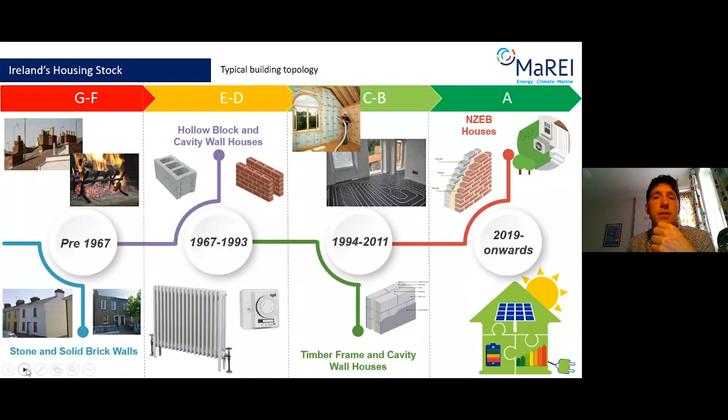So what's the quality of that building stock like? So we'll just move on to the next slide. The quality in terms of its energy performance is determined by the energy performance certificate. This is a requirement from the EU that all buildings have an energy performance certificate. That energy performance certificate in Ireland is called the Building Energy Rating.

So all new homes that are built since November 2019, and all those that get significant retrofit, have to be an A2 building energy rating or better. To put that in context, if you build a house to the building regulations 2005, the new regulations have a requirement to have an energy performance that is, in primary energy consumption, about 30% of that of the reference building in the 2005 regulations, and the emissions associated with the house about 35% of that of the reference building of the 2005 regulations.

On the right hand side, each of these building energy ratings, or BERs, have to go into the national database. It's hosted by SEAI, so there's over 900,000 entries to date, and you can see the different quality of buildings in terms of the building energy rating that we have, with the average BER being a D1. So Ciara in her first presentation is going to delve into that database in a bit more detail.

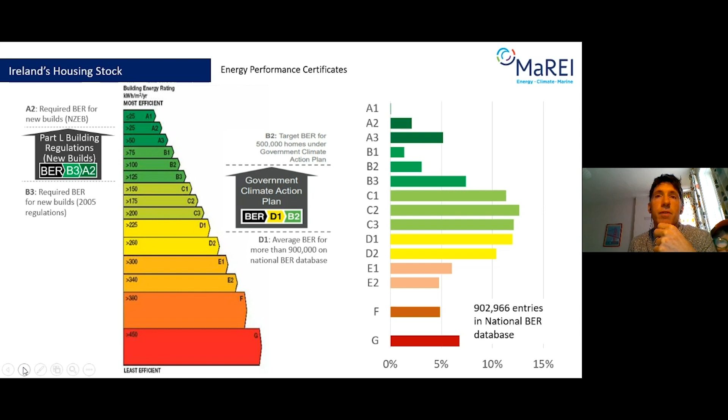So next question: the Irish government's Climate Action Plan 2019 set a target for 500,000 homes. That's 50,000 homes per annum on average, receiving a retrofit to B2 or better. So what I want to know is, that number, 50,000 homes per annum, is that equivalent to all the occupied homes in Cork, in Galway, in Castlebar, or in Dublin?

That's great. So we can see people voting away there, and that's great. So just as we're a little bit tight on time, I'll talk through the different ones.

So the top vote there is Cork at the moment. Cork City is about 50,000 occupied homes, so that's the answer to that one. So effectively, the ambition from the Irish government is to retrofit all of the homes that are occupied in Cork City in a given year, say this year or next year.

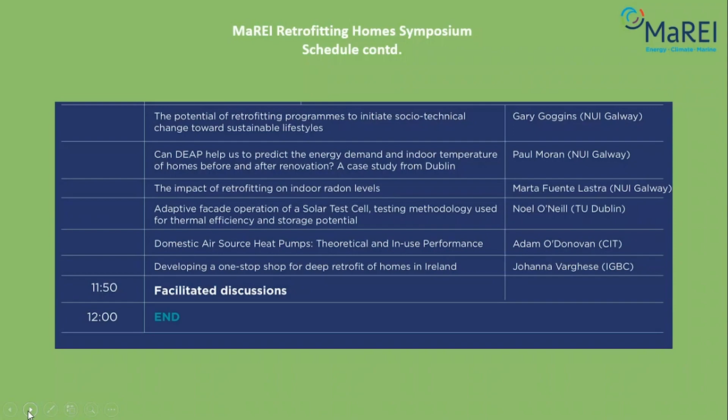Okay, so this morning we've 12 speakers coming up. So we have 2 sessions in there. So there's 6 speakers first, and that's going to be moderated by Josephine Maguire, who's the National Coordinator for Sustainable Energy Authority of Ireland. So Josephine has been more than 10 years leading strategy and programs related to retrofitting homes in SEAI. And then after that session, we'll have an afternoon session with another 6 speakers and facilitated discussions. Unfortunately, Brian Norton from TU Dublin wasn't able to join as a facilitator this morning, so I will do that. So I'm going to hand over to Josephine for the first session.

Great, thanks very much, Jamie. You're having fun there. So great to be here, everybody.

We have a great lineup for you this morning. Lots of interesting speakers talking about very interesting things that we all need to do over the next 2 years. We're tight enough on time, so I'm going to move quickly and just introduce our first speaker. It's Dr. Ciara Ahern. She's Head of Building Engineering in TU Dublin. She's been studying and analysing the Irish housing stock for more than 10 years, and particularly is interested in looking at how we integrate heat pumps into thermally refurbished stock. So Ciara, over to you.

Thanks, Josephine. And thanks, Jamie. Good morning, all. I'm here this morning to present research that was published in an Energy and Buildings paper in 2019. And the data source for the research is the EPC, the Irish EPC or BER database, which was downloaded in July 2014. And the analysis is on pre-2006 dwellings. On the next slide, you will see the number of state refurbishment grants paid in Ireland by 2015. And you'll see the lion's share of grants being paid to what are perhaps the less disruptive measures such as roof and cavity

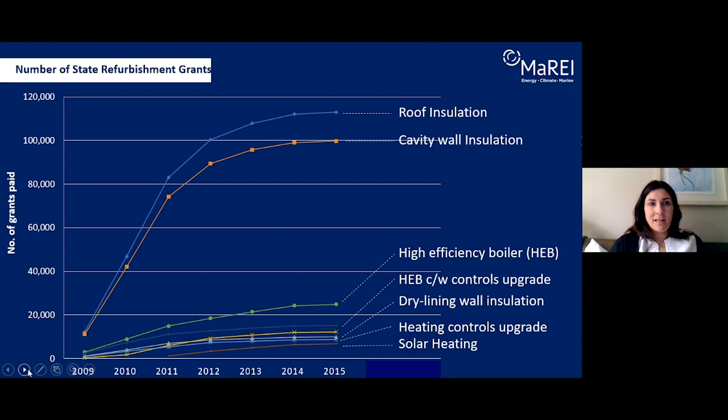wall insulation. And on the next slide, you'll see that the level of thermal refurbishments are leading to a bimodal distribution of the housing stock. On the left-hand side of the graph there, you see Mode 1 dwellings. Mode 1 dwellings represent thermally retrofitted building elements, whereas Mode 2 are as-built dwelling elements. And Mode 1 presents a more pronounced profile than that of Mode 2, as thermal retrofits are able to achieve more harmonised levels of insulation. And as more retrofits are carried out, building elements are migrating from Mode 2 as built into Mode 1 thermally retrofitted.

And this is lessening the correlation between a dwelling's age and its energy efficiency. In the tail of the distribution, you'll notice a statistically anomalous spike highlighted in blue there. This spike is seen consistently across all periods of construction across walls and roofs, and it relates to default U value selection by the assessor.

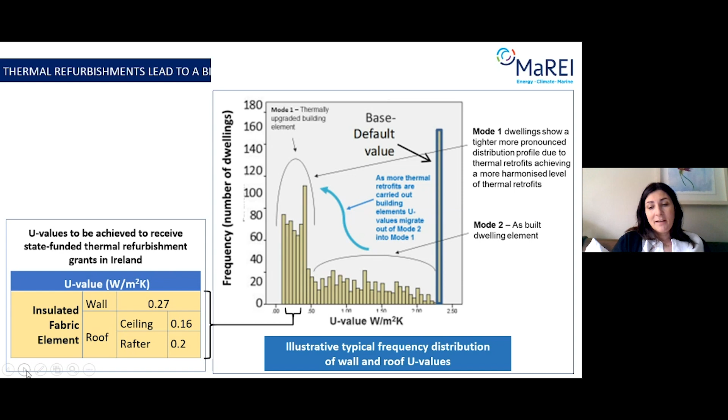On the next slide, you'll see that default U values are selected by the assessor when information on the building fabric is lacking. And this is so as to avoid costly and disruptive investigation measures into the fabric. They're standardised to support the reproducibility and robustness of the EPC as an asset rating or as a comparative tool.

The defaults are necessarily designed to be normally pessimistic, and this is to avoid offering a better than merited energy rating, but also to encourage the homeowner to maintain records and the assessor to seek out records that might improve the energy rating of the dwelling.

However, research in 2016 has found that the defaults in use currently bear no relation to the statistical distribution and are in fact punitive. A quarter of walls in the database are characterised by defaults, and this over-reliance on, combined with the punitive nature of defaults, leads to the data presenting an overly pessimistic view of the stock, and it constitutes a structural error in the data.

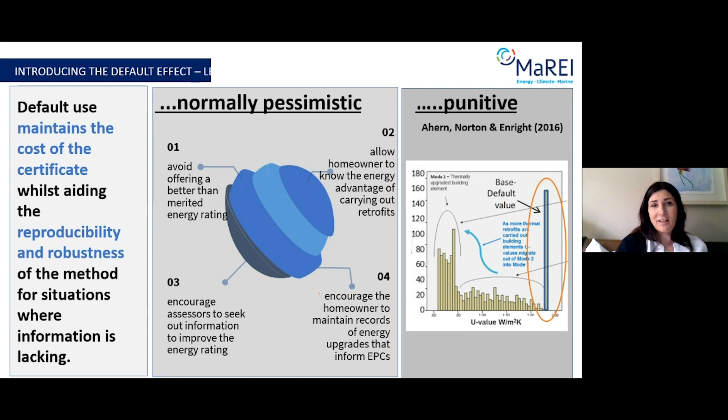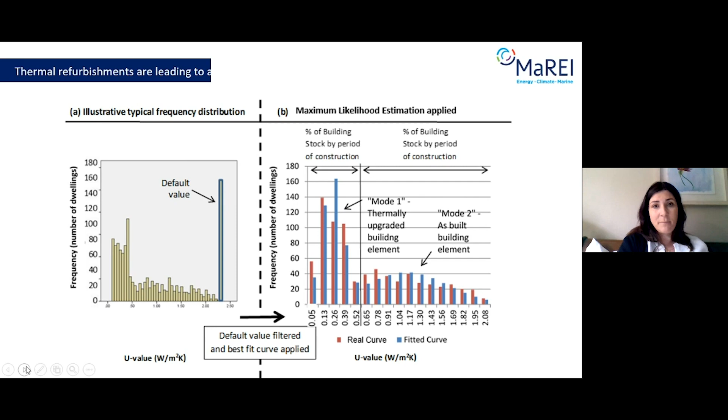On the next slide, you'll see that we thus clean the default U values from the data before fitting a bimodal curve. And fitting of the curve allowed us to establish the percentage of thermally retrofitted dwellings and the percentage of as-built dwellings, along with the mean and standard deviation of each of the modes. And on the next slide, you'll see the results.

And the results are characterised for pre-thermoregulation and post-regulation dwellings. Now, pre-thermoregulation dwellings are assumed to have been constructed initially without any insulation present, and they're ascribed default U values 2.1 watts per metre squared for walls and 2.3 watts per metre squared for roofs. It can be seen there from the results that 50% of pre-thermoregulation walls and roofs have very significant levels of insulation, and this is really positive.

Post-thermoregulation dwellings are assumed to have insulation levels in line with the prevailing building regulations of the time, and you'll see the table there below showing the building regulations prevailing at each period of thermoregulation. This research is on pre-2006 dwellings, and interestingly, you can see from the results a significant level of energy upgrades in post-regulation dwellings, with circa 70% of walls, we'll go back there if you don't mind, 70% of walls and 84% of roofs insulated to better the U values prescribed in the 2006 regulations.

Now, it's estimated at the time that 25% of the dwellings within the database are there because they were grant aided. So this level of thermal retrofits is attributed to both grants, but also autonomous energy upgrades, or perhaps the building or the dwellings were constructed to better the prevailing building regulations of the time.

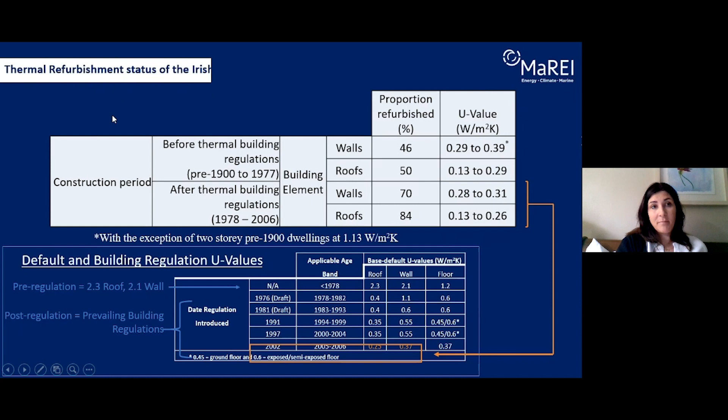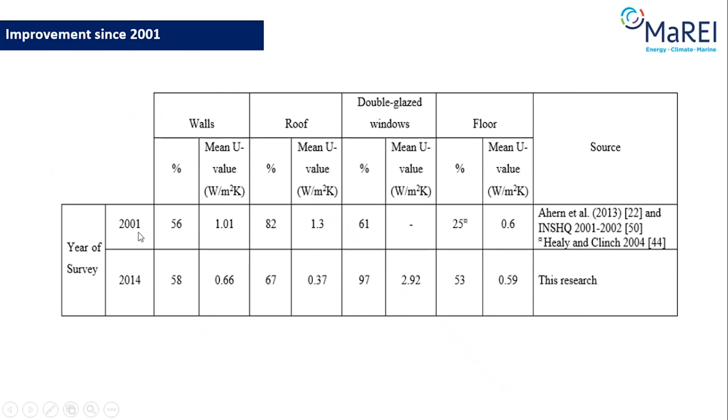So on the next slide, we'll see the results from 2014 compared with that of 2001. And we can see that 58% of walls were insulated to a U value of 0.66. So this is a mean average across both pre and post regulation across the stock. 67% of roofs to a U value of 0.37, and 53% of floors are insulated to a U value of 0.59. So on this, go ahead, Aoife.

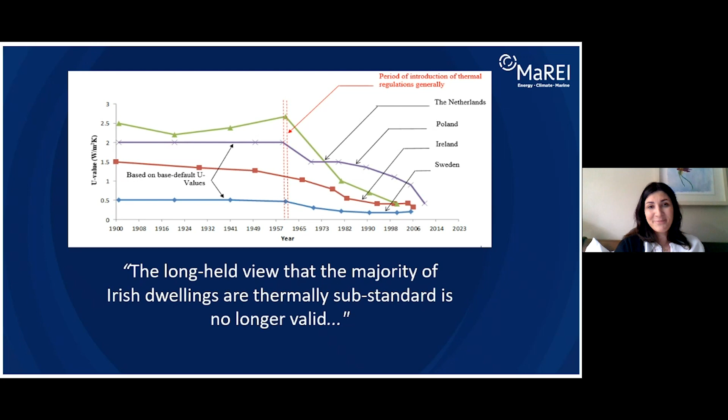Brilliant. Thank you very much, Ciara. Perfectly on time. You must have really timed that earlier. I did, otherwise I would have been ahead of it. Well done. Okay, thanks so much for that, Ciara.

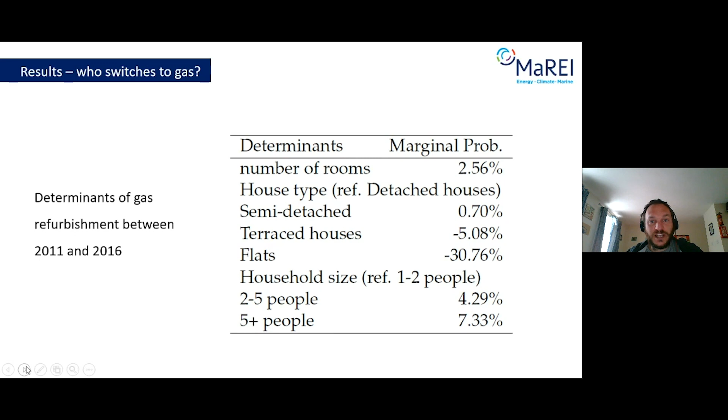And in the next slide, you will see that there are some other factors affecting these fuel choices, for example, the number of rooms, which is a proxy for the size of the house. So larger houses are more likely to be connected in 2016. The house type, so detached houses and semi-detached houses are more likely to be connected compared to terraced houses and flats. Larger households are more likely to be connected compared to smaller households. So probably these decisions are affected by the cost, as you would normally expect from fuel choices. So these are the results that I have to present today, and thank you. Still work in progress, as I said.

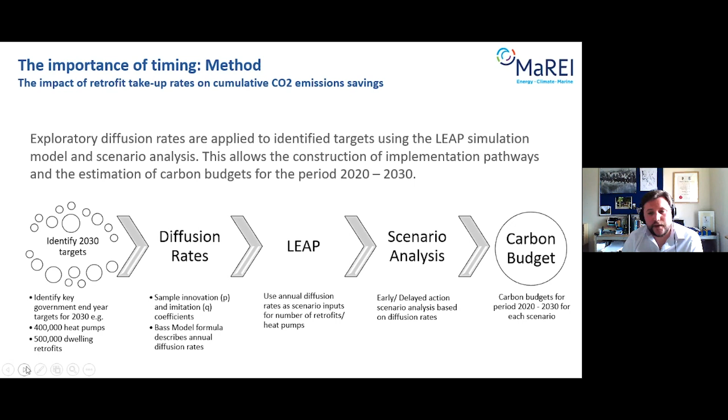We used the LEAP Ireland 2050 model to then actually simulate those pathways and do some scenario analysis. So again, the scenarios being early and delayed action based on those diffusion rates, and then implicitly that generates these carbon budgets for the period 2020 to 2030. So moving on.

Quick background on context, you've heard some of this already, but large-scale deep retrofitting has been slow and challenging in Ireland. The SEAI deep retrofit programme, I think it was 325 deep retrofits delivered for the period 2017 to 2019. So there may have been some autonomous ones, but in terms of ramping that up into a national scale and delivering these 50,000 per annum retrofits, that's going to be challenging.

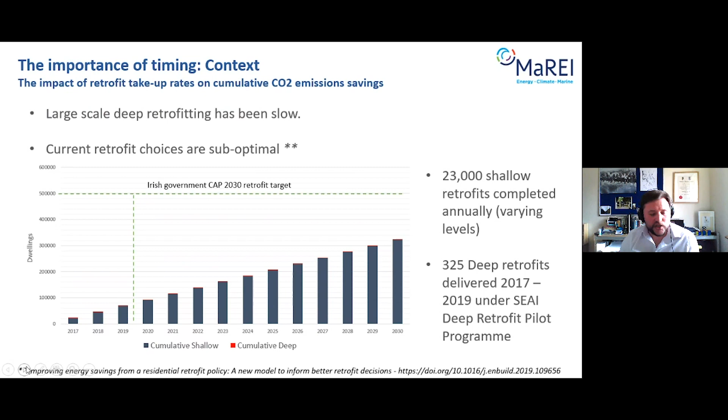There's about 23,000 shallow retrofits completed per annum to varying levels of energy efficiency based on which combination of retrofits. And I've noted a publication here that indicates that the current retrofit choices are in fact suboptimal and could be improved. So moving on.

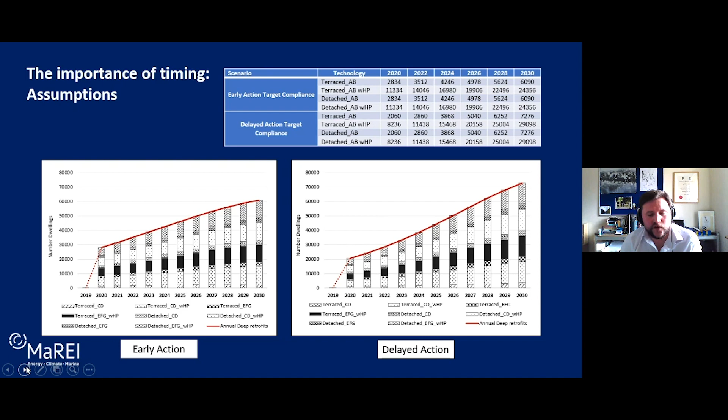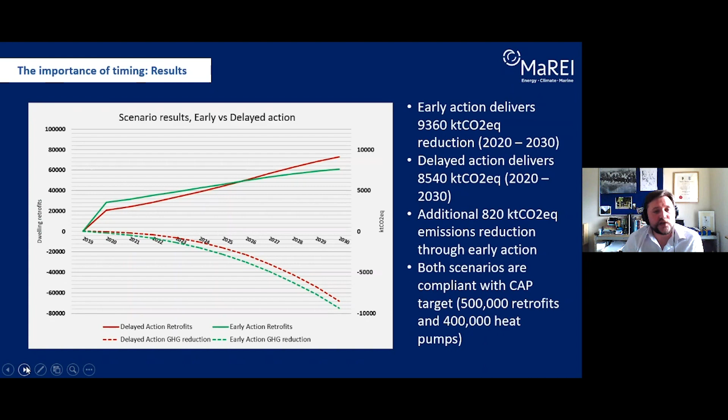Equally, the red solid line is the annual retrofits required within the delayed action scenario. So it's ambitious, but still 20,000 per annum in 2020, rising up to 72,000. And the difference between those two scenarios, I have the figures here on the right in terms of the reduction in both scenarios. But the difference between the two dashed lines is that 0.82 million tonnes that I mentioned at the start. And just to mention, both of these scenarios are CAP compliant, so 500,000 retrofits.

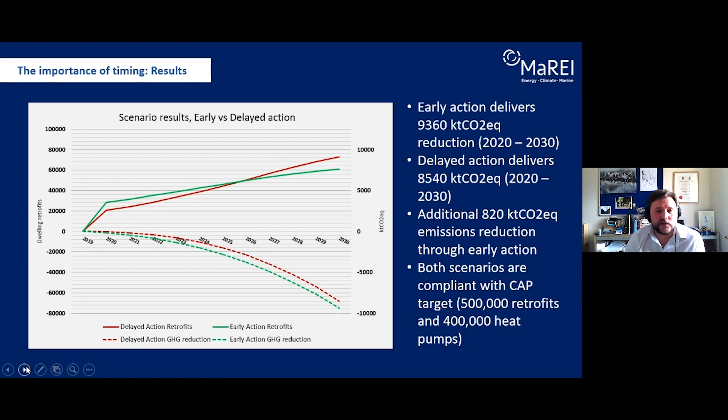One minute, that's perfect. So, conclusions from this: clearly early action is required to deliver those maximum benefits, but more importantly, it highlights the need to start focusing on target delivery pathways and not get bedded down in these point-in-time targets for 2030. It's really important to be able to visualize and indicate how many retrofits we need in each year, not just for compliance, but also checking in on ourselves every year or two to see how well we're doing.

Early action can deliver some additional benefits, i.e. less pressure on the transitional pathway. So I indicated there 16% fewer retrofits in 2030. That's 72,000 retrofits in the delayed action scenario versus 60,000 in the early action scenario. So it makes it a little bit easier later on.

And further analysis is required to quantify the impact of the pre-works condition of these dwellings in terms of scenarios that we might develop, because I've assumed an even distribution across C, D and E, F, G, detached and terrace dwellings. So we could look at that in more detail, focusing just on the worst performing or the least energy efficient dwellings going forward. So thank you very much.

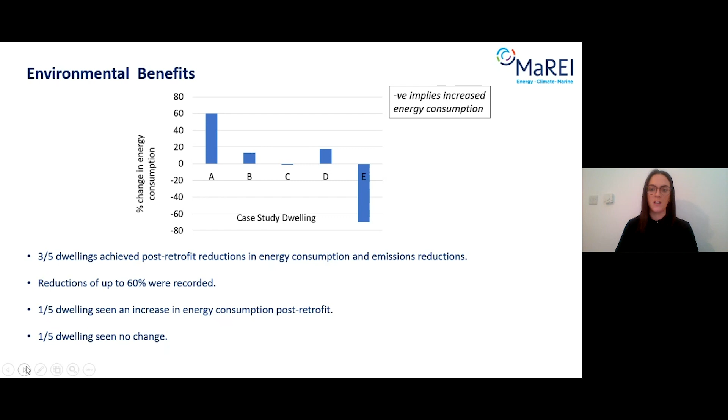So moving on. So in terms of the social benefits that were received, the assessment of comfort was based on temperature and relative humidity sensor data and householder survey responses. And this revealed that 3 out of 5 case studies achieved post-retrofit temperature improvements with an average temperature increase of about 1.1 to just above 3 degrees recorded. The percentage of temperature readings recorded in these dwellings to be below 18 degrees also decreased post-retrofit in these case studies.

So the householder survey results differed slightly from the measured results, and they showed that 4 out of 5 case studies actually cited that they were more comfortable post-retrofit, despite the fact that the measured data in one of these case studies did not necessarily reflect theoretically more comfortable conditions. So in terms of the fuel poverty alleviations, there were no fuel poverty alleviations achieved in the dwellings post-retrofit, nor under the future period that we assessed in the study.

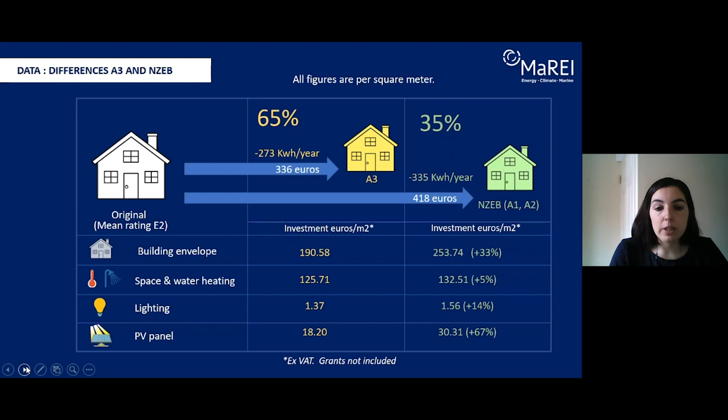If we analyze the whole budget, the cost breaks down into 4 categories. For the building envelope, including ventilation and airtightness, to pass from A3 to NZEB we need to invest 33% more. In space and water heating, around 5% more, in lighting 14% more, and in PV panels 67% more. So if we pass to the next, please. If we analyze the envelope in detail, we can see that the main difference is in the walls, followed by the floors. By contrast, the windows and doors are very similar.

So in summary, the key points to upgrade from A3 to NZEB, according to the data in this database, are that we need to increase the total budget by 82 euros per square meter, spend 77% of this extra money on the envelope, of course improve the walls, and install a PV panel, because 91% of the NZEB dwellings have one.

So ending, with the actual data we can better understand the typical costs of deep retrofitting homes through the Super Homes program. Now we are analyzing whether it could have been economically feasible to achieve the new NZEB standard for all homes in the Super Homes program rather than the A3 rating. The project is running until September, so we expect to have a full report of the findings completed by then. So thank you so much for listening and enjoy the symposium.

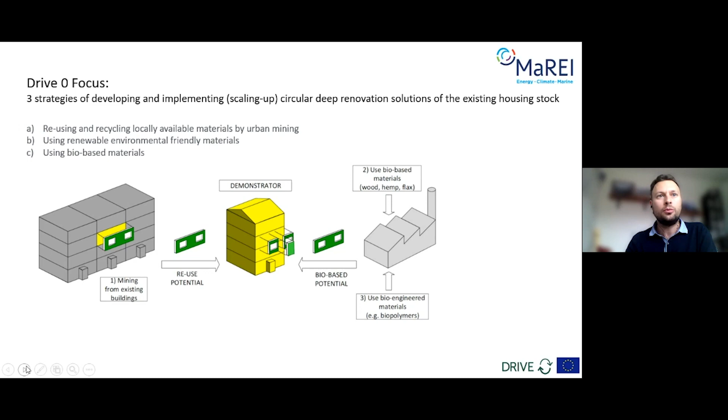One of our objectives is to develop easy to install plug and play prefabricated solutions for elements of the building envelope and for building services. To develop and implement a circular deep renovation solution, we are using 3 strategies: first, to reuse and recycle locally available materials by urban mining, use renewable environmentally friendly materials, and use bio-based materials. Next slide, please.

So for our case study, we're working with Dublin City Council, and we aim to retrofit 2 or 3 semi-detached terrace houses. Those are built in the 60s, and the main issue we're addressing here is the poor energy performance, with a building energy rating of grade F, resulting in poor health and comfort, but also we have poor accessibility to the space for disabled and elderly people.

And we need to go through all these steps with a user-centered mindset where, for example, occupants engage in the design process and suffer minimum disruption during the integration. We want to repurpose the space efficiently and increase access for elderly people and disabled people. Next slide, please.

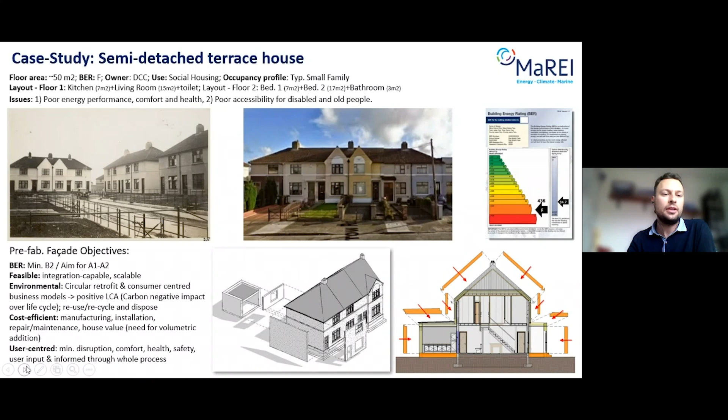To meet the objectives previously discussed, we developed this monitoring action plan. Our concept included the use of IoT and ICT-based solutions with various levels of information according to the targeted end users. We also aim to design a future-proof solution that would be a smart building with customizable, modular, and expandable monitoring and control solutions with potential connectivity to services.

And we wanted to dynamically inform and communicate with end users. And this is not only to provide information to the occupants, but also for the occupants to provide feedback during the building operation. And in our methodology, we consequently had to identify attractive and understandable user information.

With that process, we defined mandatory and voluntary monitoring parameters to quantitatively and qualitatively evaluate the building performance and the benefits to the occupants. With that in mind, one of the challenges we had in the selection of monitoring equipment was obviously to find a trade-off between the cost of equipment versus the benefit. Next slide, please.

So what are the types of data we need to monitor? Those were classified among the 7 pillars of sustainability. The mandatory parameters that must be monitored are the delivered energy demand and the renewable energy produced and consumed. In the health and well-being category, that would be air temperature, relative humidity, and CO2 concentration, as well as qualitative and perceived information of well-being.

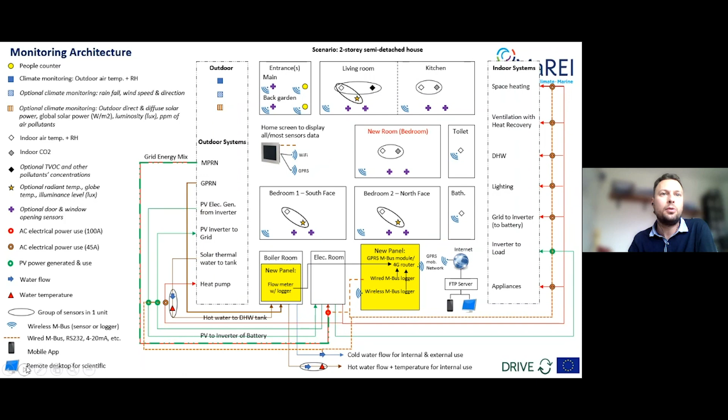The information collected can then be displayed to the occupants via a home monitoring screen or through a mobile application. Similarly, the occupants will be able to provide live feedback about perceived health and comfort parameters through the screen and the app. And finally, all data will be curated and analyzed to demonstrate the improvement of the building performance and validate a business model. Next slide, please.

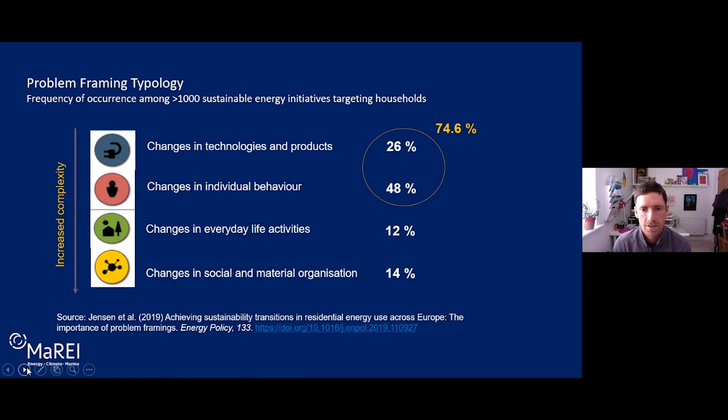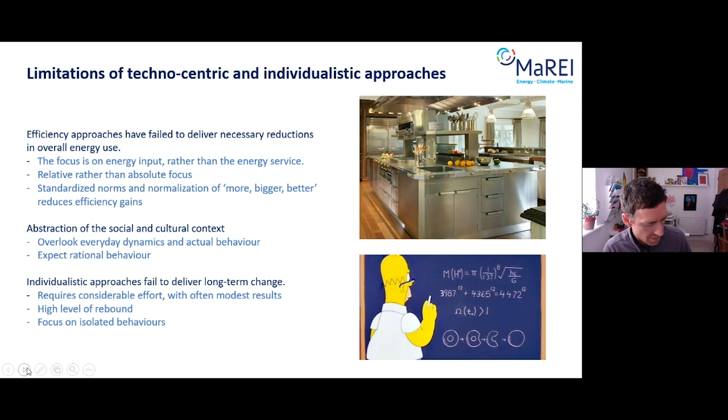So I'm looking at an alternative option, which my next slide looks at: how we might understand energy use through a practice-based approach. So here we shift the focus from individual behaviors to look at the social organization and what underpins energy use. Here we understand energy use as a consequence of everyday practices. So we look at the service, what energy is used for: mobility, heating, cleaning, cooking, etc. And we say that these are socially significant, and people are carriers of these practices. We reproduce things in certain ways. So if we can understand why people do this, then we can understand opportunities for change.

My next slide just shows the different elements in practices. When we look at it from a practice theory approach, we say that there's three different key areas: material conditions, technologies; meanings and social norms; and competence and skills. So a practice-based approach will try to change these elements, so either recraft by changing individual elements, or else substitute practices by completely changing one for the other, like swapping driving for cycling, for example. We can also look at how practices interlock, so how maybe mobility relates to your work, or how eating relates to shopping, relates to mobility, etc.

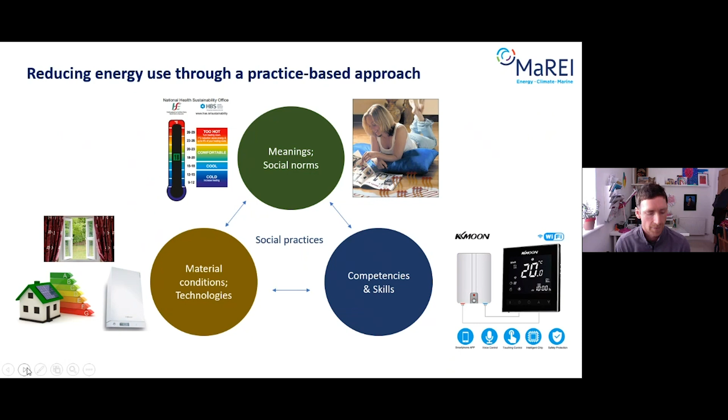On the next slide, I'll just give you some results that we had from ENERGISE, where we used a practice-based approach. So we went to use a living lab. We went into people's homes to ask them to try out new ways of living, and we asked them to reduce their maximum indoor temperature to 18 degrees. So we wanted to learn, experiment. We didn't want to tell them what to do. We wanted to maybe see how they cope with doing this.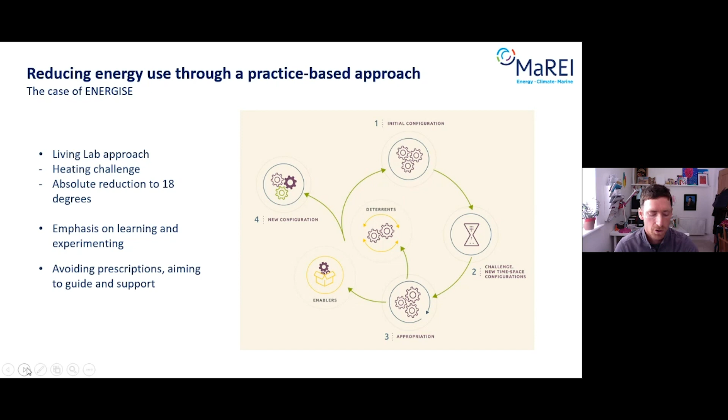And so the living lab was really an intervention, and we observed how change came about. So on the next slide, I'll just show you some of the results that we got. This was across 8 different countries and over 300 households. So we found that people could quite easily reduce their indoor temperature by at least 1 degree without compromising any level of comfort. They didn't really notice.

Also, the ideal temperature doesn't exist. It depends on the room. People like it warmer in some rooms, cooler in others. Life stage, elderly people tend to like it warmer. Social relations, people would turn on the heat if guests were coming over. They were afraid of looking bad in front of other people having a cold house.

Also, we found people's bodies are excellent sensors. They were very adaptable. People found it cold at the beginning, but as the challenge went on over the 4 weeks, people were able to adapt, and they said, oh, I got used to it being cooler. They also intensified practices, wear warmer clothes instead of heating the whole house, and lower heating in the bedroom was desirable. So they didn't want the bedroom to be as warm as the rest of the house.

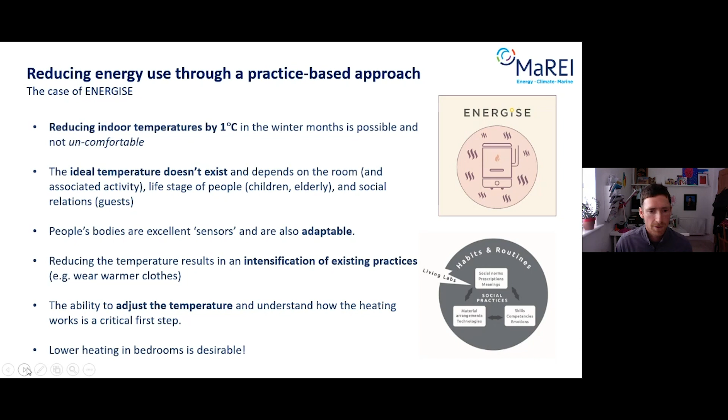So taking these lessons on the next slide then, how can we use these findings in retrofitting? Well, instead of living labs being a rupture in habits and routines, maybe we can look at retrofitting as a rupture in habits and routines. And say, well, while people are getting retrofitting done, there is some upheaval in their lives, and can we now introduce new, more sustainable practices? Can we challenge social norms around unsustainable behaviours?

And if we can do this, and we can, I believe, well, who should take responsibility? Who needs to be involved, and in what capacity should they be involved?

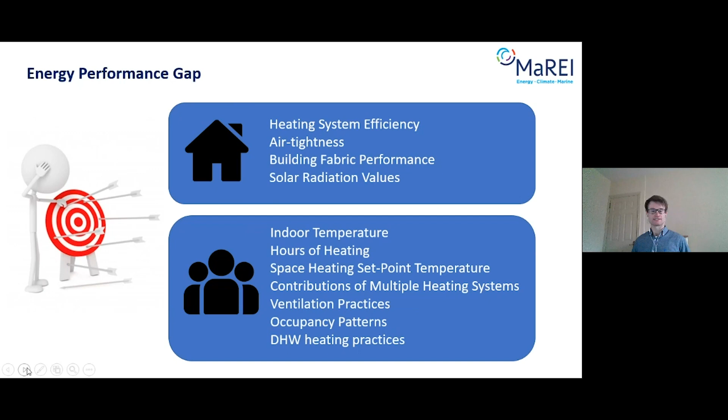So the housing estate itself was constructed in 1994 and 2000, and it consisted of mid-terraced, end-terraced and semi-detached homes. The monitoring was for 6 months pre-retrofit and up to 18 months in some case studies post-retrofit. The houses themselves received a standard retrofit package with cavity wall insulation, attic insulation, new windows, new doors, and an upgraded heating system consisting of a gas boiler and hot water tank.

So these houses were monitored. 22 of these houses were monitored in depth. Their electricity and gas demand was monitored. Up to 4 rooms in each of the case studies had temperature and relative humidity sensors installed in them. And then we interviewed householders in each of those case studies. So gas was the primary source of energy for the space and water heating in these buildings.

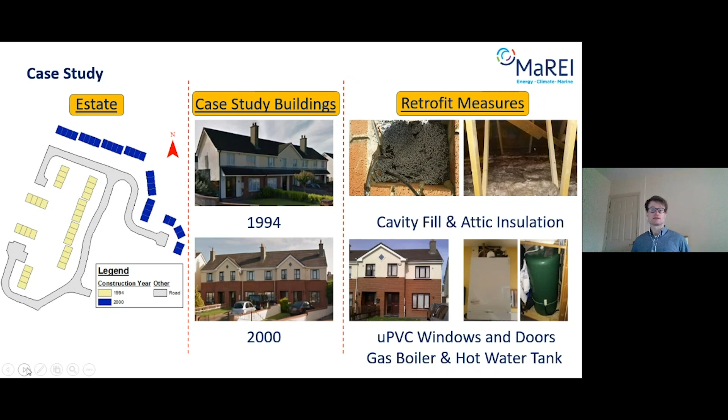And as I've illustrated on the next slide, the theoretical and actual energy demand of those buildings, both pre and post retrofit. The results I show here are for 3 months of the year, so March, April and May. On the left hand side, I've shown the pre-retrofit demand, and on the right, the post-retrofit demand. The orange line I've shown on each graph illustrates where the data point should lie if both the theoretical and actual energy demand is in agreement.

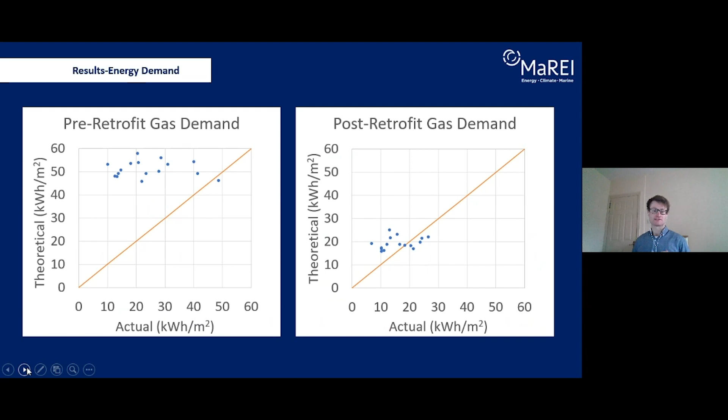However, as we can see, pre-retrofit DEAP overestimates the energy demand of those homes, and for many of those houses in a large way; only one house actually uses more energy than DEAP predicted. So while the energy performance gap actually reduces post-retrofit, the initial pre-retrofit estimation means that only 25% of the expected energy savings were achieved. Now, looking at those data points, one might suspect that DEAP also overestimated the indoor temperature levels of the homes, but as I've shown on the next slide, DEAP actually underestimated the indoor temperature levels of those homes.

So when DEAP estimates the energy demand of a home in terms of its space heating, it is based on the floor area of the building, the efficiency of the heating system, the temperature differential between the indoor and outdoor, and the indoor gains that the house experienced from solar energy gains and from the appliances themselves, but then also the heat loss coefficient. The heat loss coefficient is the U value performance of the building elements, the area of the building elements, and then the air tightness of the buildings themselves.

So because DEAP overestimated the energy demand and then underestimated the indoor temperature, we suspect that the heat loss coefficient was initially overestimated, because the U values for the windows and doors pre-retrofit were based on default U values because we didn't have any other information. Then for the floors, pre and post retrofit, we also had to use default information, and then we had to use default information for the air tightness of those buildings.

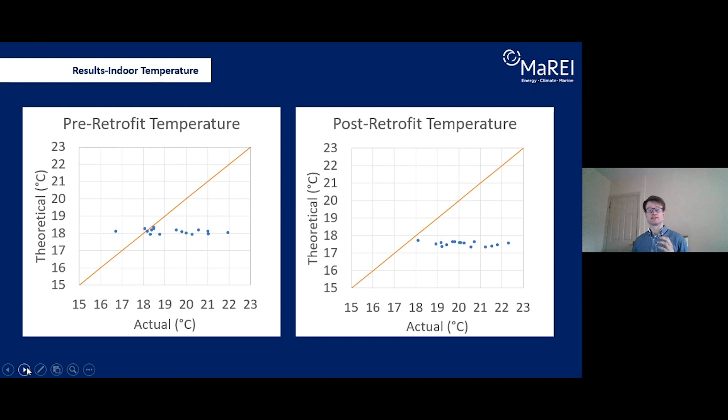So if homeowners, tenants, governments want to rely on the information that these tools provide in terms of the energy performance levels and indoor temperatures of these homes, we need to be able to verify that the values that we input into those tools are actually accurate. Now, we weren't able to estimate how much the heat loss coefficient possibly was driving the difference in energy performance levels, and the sample size was of course small. So we need much larger studies examining exactly what are the factors driving the energy performance gaps between these kind of tools and what actually happens inside those buildings.

So finally, just to reiterate some of my points, DEAP overestimated the energy demand of these houses and underestimated the indoor temperature levels. Only 25% of the expected savings were achieved by these buildings, and the heat loss coefficient is expected to play some sort of part in that. And as I said, further studies are needed to exactly determine what is causing these kind of energy performance gaps between the theoretical and actual.

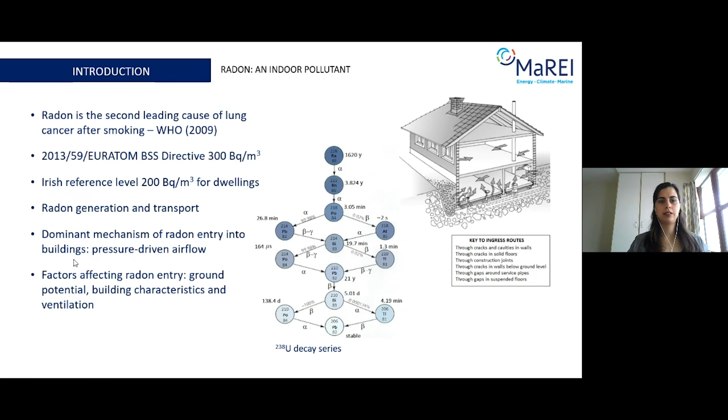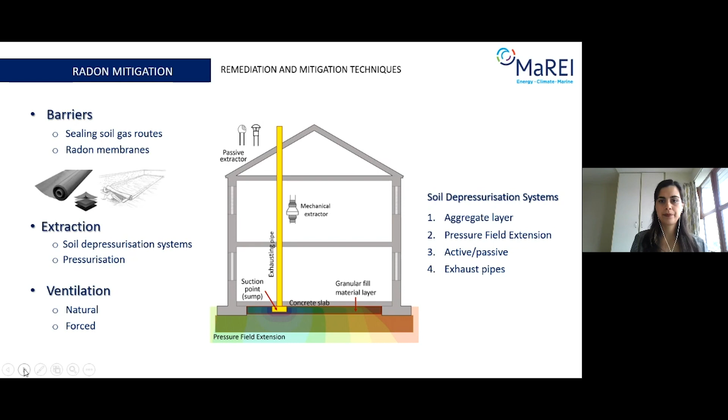The central picture on this slide is a soil depressurization system, which is characterized by a suction point, an exhaust pipe, and then a means of extraction, which can be a mechanical or a passive structure. So what we do with this technique is create a depression below the concrete slab. So we attract all the radon below the slab, and we exhaust it outside the building, preventing its entry. For the soil depressurization system to be very effective, it is important: what's the building envelope? What are the characteristics of the aggregate layer and the pressure field extension?

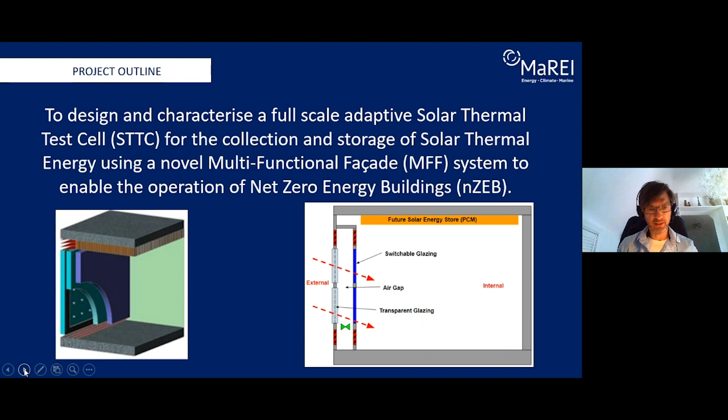Okay, so on the next slide, the aim of the project is to design the solar thermal cell with a multifunctional facade to collect solar thermal energy, and then to measure and test the performance of the multifunctional facade operated under various typical scenarios that would be expected, and I'll look at some of them. And finally to test the methods to analyze it and test its performance.

So the next slide is a look at where the cell is located. The cell is shown on the top left-hand side of your screen in the Grangegorman campus. It's basically a porta cabin. The picture there is an old picture; it's been upgraded since then. It's split into three rooms. The far left-hand room is the cell itself. It's been thermally upgraded. It's a south-facing facade, and the multifunctional facade is fitted on the outside of the cell. The cell itself is approximately 2.8 meters long by 2.5 meters wide and 2.5 meters high.

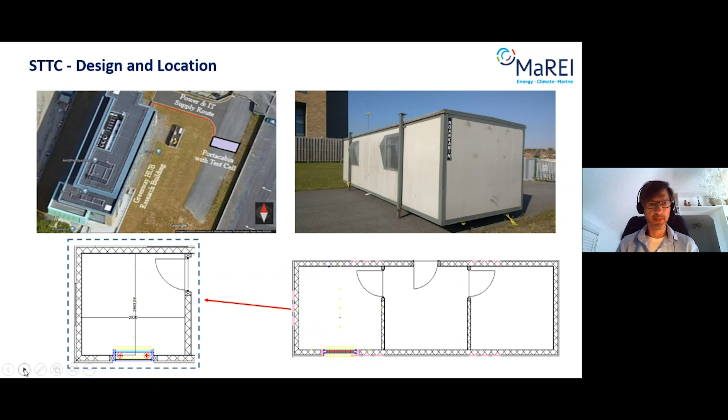So how it's going to be operated is shown on the next slide. The operational concept is for 4 typical modes. Firstly, mode 1 on the top left-hand corner is the heating mode, when heating is required. The vacuum glazing provides thermal insulation, and the solar thermal energy is transmitted through the suspended particle device in the transparent mode.

Mode 2 then is the top right-hand mode, where heating isn't required. The 4 dampers, top and low-level, are arranged to direct energy to the phase change material store, and it's collected there for use at a further time. Mode 3, the bottom left, is where the suspended particle device glazing is in the opaque form, and the air is heated and transferred into the store.

And then finally, mode 4, bottom right, is shading and ventilation. Here the store is fully charged, and we can then use the ventilated facade to help ventilate the area, and also, if you don't need heating, shade it.

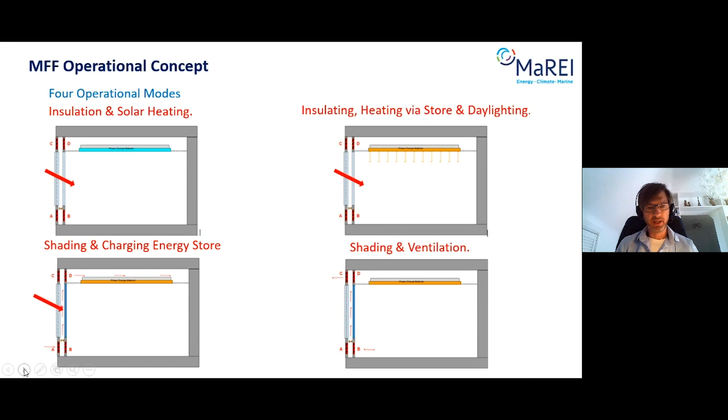Okay, the components of the facade itself. The first slide there shows the high and low level dampers. The external part of the facade, as I said, is a vacuum glazed panel. There's a gap of around 300 millimeters between the 2 panels, and the internal panel is a controlled switchable glazed panel, from opaque to transparent. In the facade itself, you can see there's small fans.

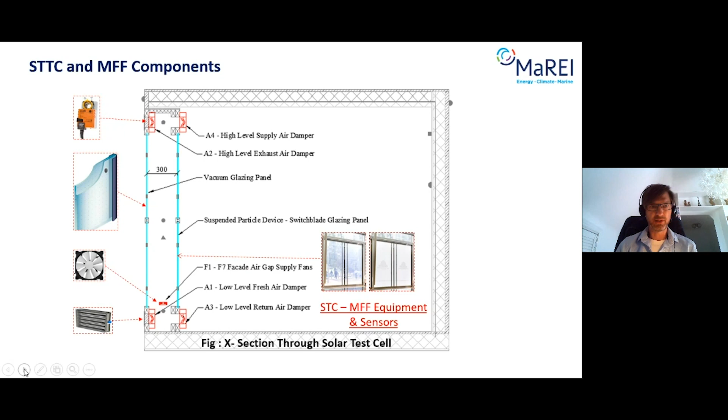They're just typical computer fans. There's about 7 of them. That's the components. Then click on for the actual measurement devices. So we're going to be measuring inlet and outlet temperatures, air speed or air mass flow rate, and external air temperature and external solar irradiance levels. Okay, so they're the kind of main temperature readings and main data we'll be recording.

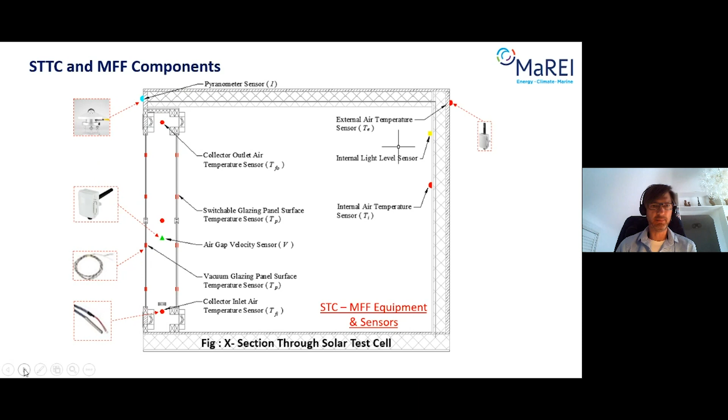So next slide for the initial operation. So the initial operation is what we're going to call external air heating, where the air comes in the damper A1, shown on the bottom left-hand corner of the facade. The fans are switched on, so the 7 fans will be on. They can be operated from 1 to 7 in lots of different modes as well.

So the fan will be switched on, it'll blow air up into the outlet air damper number A4, and the switchable glazing will be in opaque mode. So it'll heat the side of the switchable glazing, and air will be heated up and then transferred into the space. Next mode then is the internal heating. It's basically the same, except the damper A3 is open.

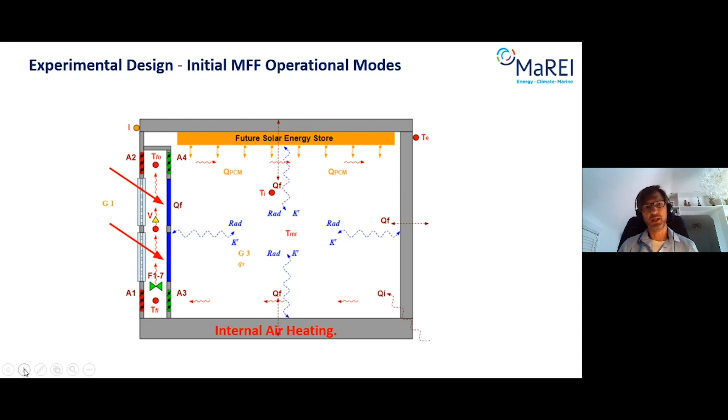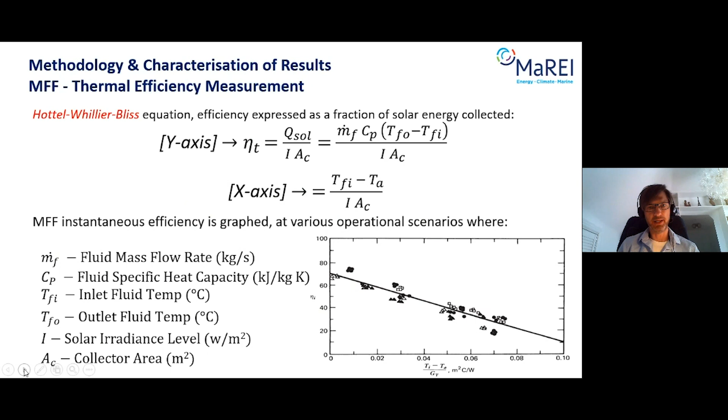Then finally onto the methodology and testing. So we're going to use the Hottel-Whillier-Bliss equation. It's basically a solar air thermal collector, and we'll be measuring the solar energy collected as a ratio of solar energy that hits it based on the area of the collector. And then finally, the potential energy can be measured if we move on to the next slide. The potential energy will be measured based on solar load ratio.

Okay, so we're looking at the solar heating factor. So solar load measures will look at the solar heating factor as amount of energy that is provided by the solar collector based on the energy required for the room. If the full heating is provided by the solar collector, you don't need any heating, so it's 1 or 100%. Anything above 1 is potential for solar energy to be collected. Again, I'm going to be looking at all of these on the various different operational scenarios.

Thanks, Noel. Very good. So we move on to our next presentation, another one on technology. This is being given by Adam O'Donovan, who's a postdoc researcher in CIT, and he's going to concentrate on domestic air source heat pumps. So over to you, Adam.

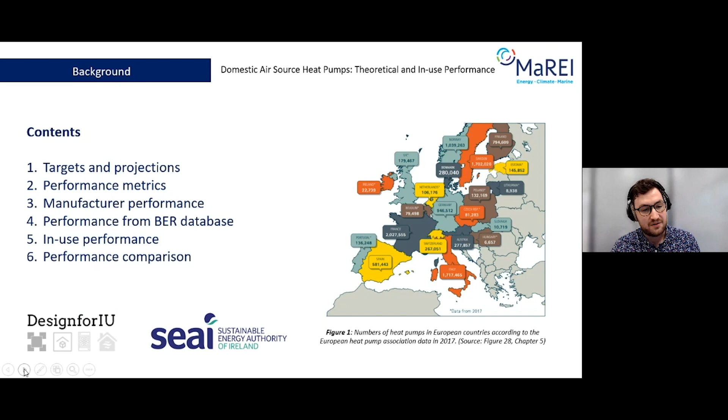Next slide, please. So there is an ambitious expectation that there will be over 600,000 heat pump installations in residential buildings by 2030. Here's the cumulative figure in 2017. In figure 2, you can see it. And over the next 10 years, we're likely to see upwards of 50,000 heat pumps installed annually. That's what we want.

While this is ambitious, and the cumulative target here is obviously very low at the moment, there is some cause for hope. In figure 3 on the right, we can see the number of buildings in the BER database with heating system main efficiencies greater than 100% and less than 100%. And for those of you who were religiously following the BER database like me, 2019 marked a very interesting year, where this was the first year where heating systems with efficiencies greater than 100% outnumbered those with efficiencies less than 100%. So this reflects the increase perhaps in heat pump technologies over boilers.

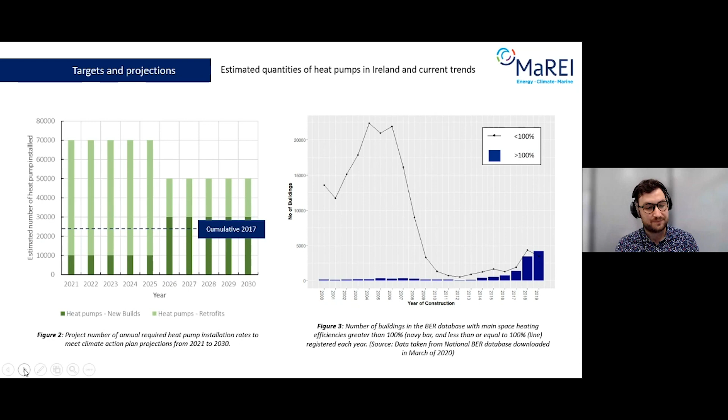However, given the heavy investment in a single technology and the scale of installation ambitions, it's crucial that we understand the performance of heat pumps. Next slide, please. So the performance of air source heat pumps is typically represented by instantaneous values like this coefficient of performance, or can be represented by manufacturers seasonally using a seasonal coefficient of performance, which, if you look at the green box, takes into account various factors, various variables.

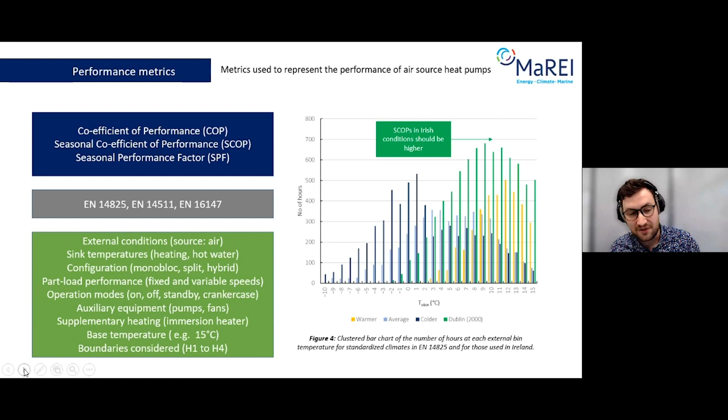SCOP is typically calculated and reported by manufacturers for typical climates, the average, colder or warmer climates. And as you can see in figure 4 here, we have the binned number of temperatures for these climates, but also for Dublin. In Ireland, efficiency values that are entered into DEAP account for climatic conditions in Dublin. So in theory, SCOPs in Ireland should be higher, or calculated SCOPs.

Next slide. Table 1 indicates the performance here of 9 heat pumps from 5 manufacturers in Ireland. We took into account various heat loss indicators to give ourselves a range of rated capacities. And overall, you can see there's a range from 3.2 to 5.2, with an average of 4.4 for space heating, and a range of 2 to 2.9, with an average of 2.5 for domestic hot water. There is some variance between manufacturers of around 200%, and this is usually due to the quoted supply temperature for space heating, where we're looking at radiators or underfloor.

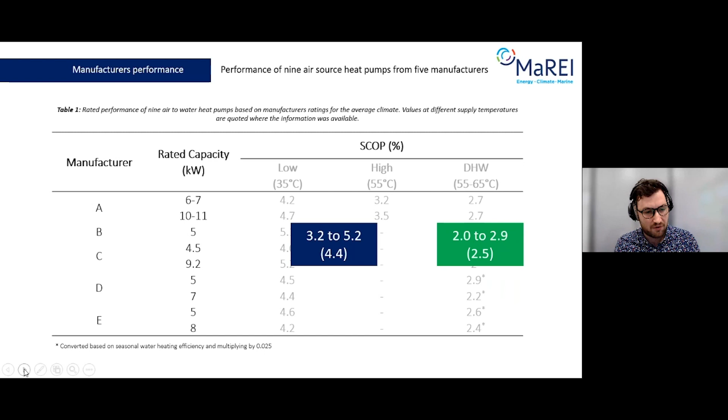Next slide. Figure 5 here shows box plots of the performance from the BER database and compares this to the manufacturer line in white. Where we compare the manufacturer's quoted values, you can see that the mean values and the median values from the BER database for the manufacturer and BER seem to be quite close. However, there is some difference, about 40% difference between manufacturer values in the BER database.

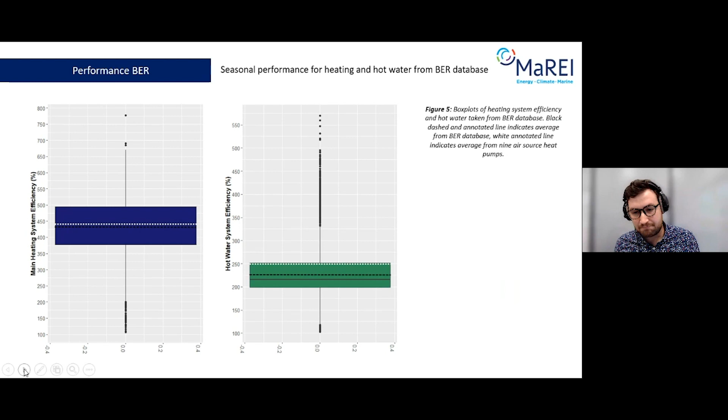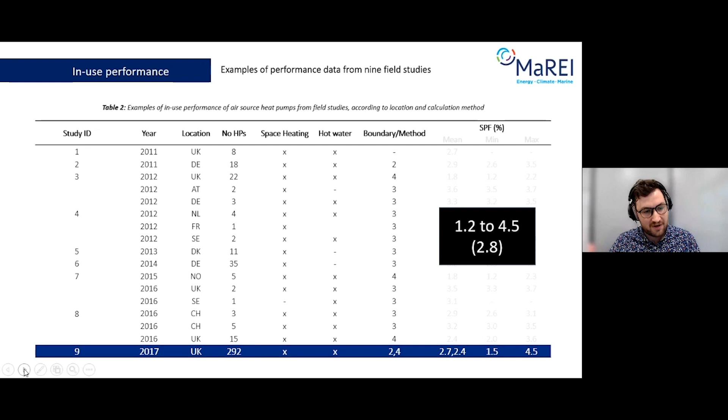On the next slide, you will see a table of 9 field studies of actual performance from Europe. And a lot of these studies have a mixture of heating and hot water, and it's difficult to extract exactly heating from hot water, but overall, the seasonal performance factor identified in these studies ranges from 1.2 to 4.5, with an average of 2.8. In blue, I've highlighted a study from the UK, one of the largest studies, which has a similar spread to the overall table here, and has an average seasonal performance factor of 2.7. So the question here is, do heat pumps perform as they should? And our manufacturer values, BER values, are they all matching up?

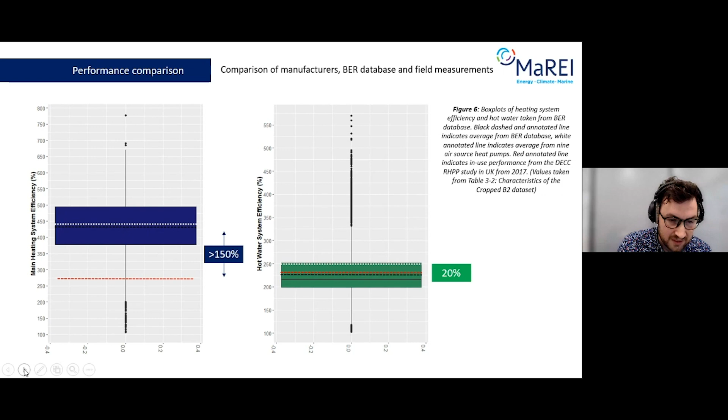So, to summarize what we're doing in the project, we're measuring the performance of nine air source heat pumps. We're calibrating a high resolution model to extrapolate that and also look at the different scenarios that affect these, and we're also gathering the opinions and perspectives from industry professionals in the heat pump area.